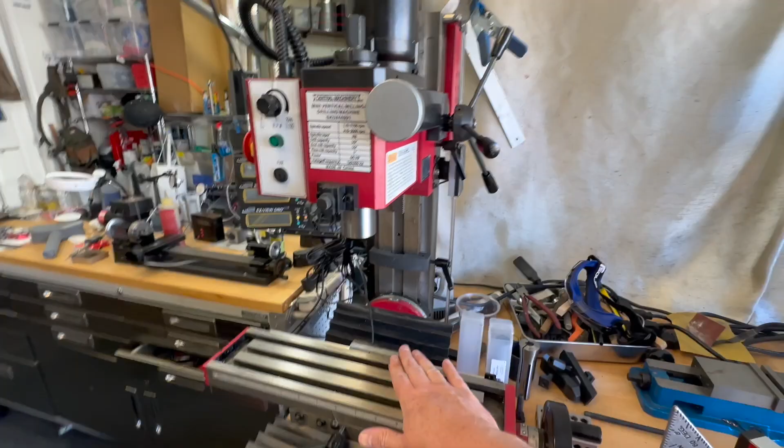Today we're going to be talking about aligning our Harbor Freight mini mill to the bed. So this is our table, sometimes I call it the bed. It moves all around under the mill head, which can move up and down. Now, for a lot of things, we want the tool that's coming out of the mill to be perfectly 90-degree perpendicular to the table. Now, the problem with a lot of the Harbor Freight mini mills like mine, or maybe it's a good thing, is the angle is adjustable.

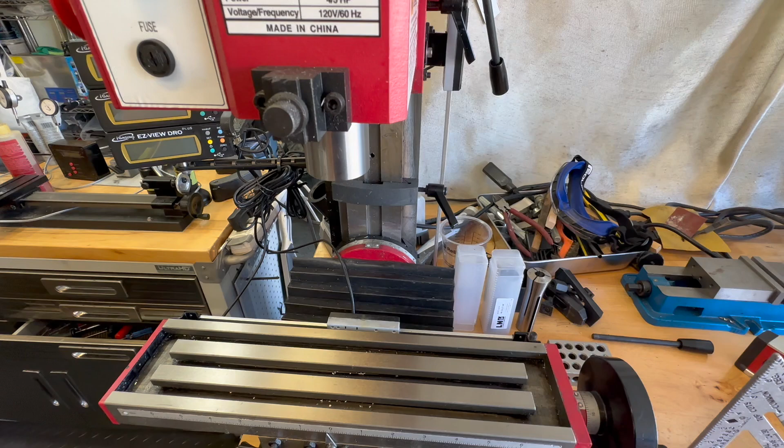Now, as you might expect, this indicator right here is useless. It'll get you maybe within 5 degrees, something atrocious. So you're better off just ignoring it until you set your own vertical alignment, and then obviously you can put your own mark in there to be helpful. Now let's talk about a couple of different ways we can do this, starting with relatively cheap and easy ones, then on to more expensive ones that are going to offer more accuracy and precision.

So we're going to start out with something very easy, which is a lot of people have a digital level. This is nothing particularly special.

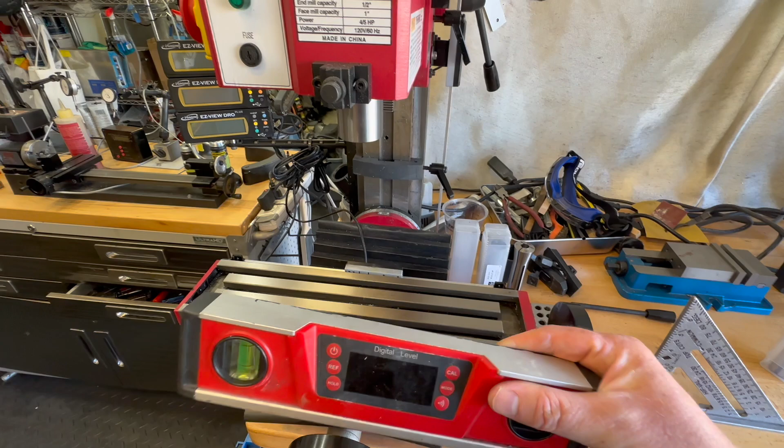So what we're going to do here is first make sure our bed's all nice and clean, so there's no crud on it, because we do want to make sure we get a really good alignment. We're just going to get this on here. It doesn't magnetically stick to it. Fire it up. You see it's giving us a 0.3 degree angle.

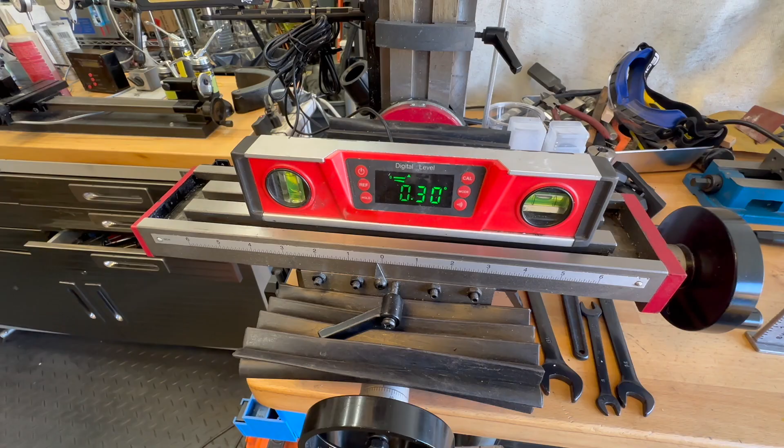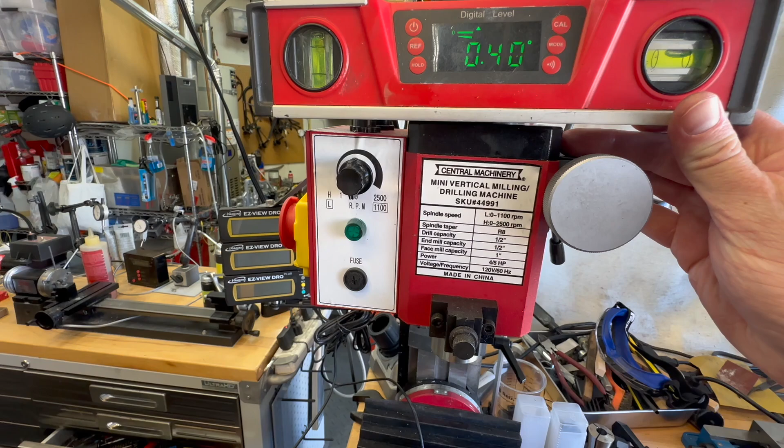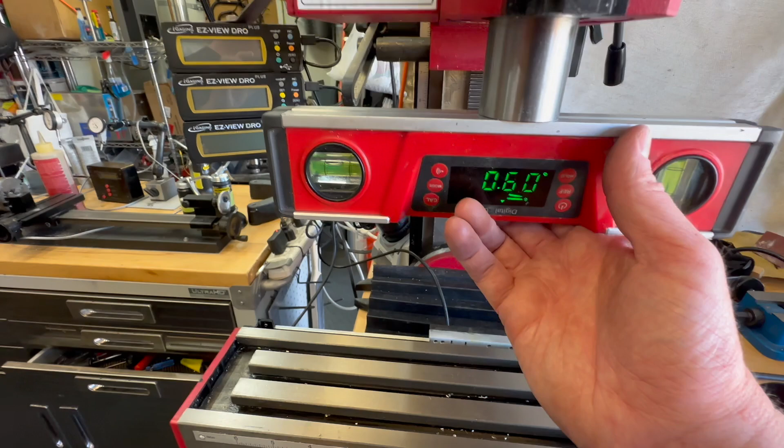Now the question becomes, well, what do you align it to up here? One of the things we could do is put it on top of the mill head here, 0.40, which means we would have to rotate it to the left to get it into alignment. You can see if we put it on the head itself, probably the most accurate, we're getting about 0.6. So let's try to get this in line with what this is here. Let's try to get it to 0.3. So it's saying we're about 0.25 degrees off.

What we're going to do is loosen the bolt back here just a little bit. And we're going to tap with a hammer up here, make real small adjustments hopefully, until we can get this part to be the same as this part down here.

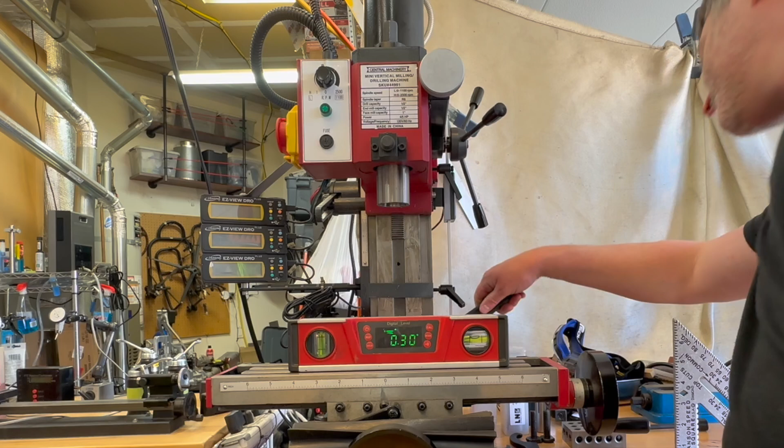All right, I don't know how loose we're going to have to make that, but as you can see with the wrench back there, it's the wrench that comes with it, 36 millimeter. We loosened it a little bit. Might have to loosen it more, but let's try starting there. It's not going to hang from this, even though it is magnetic. A few taps, let's see where we're at.

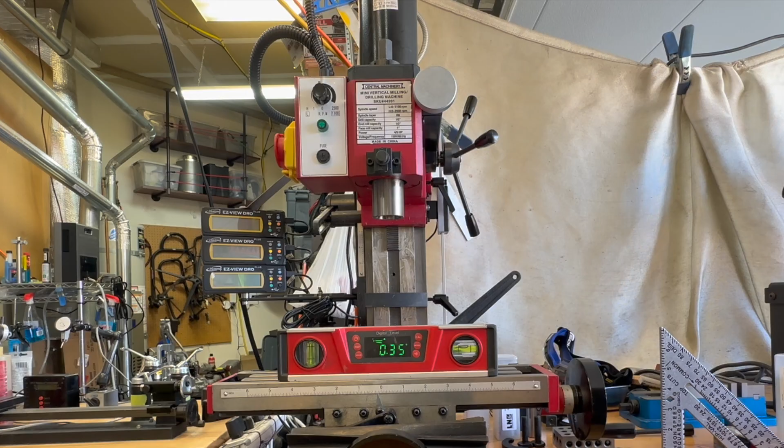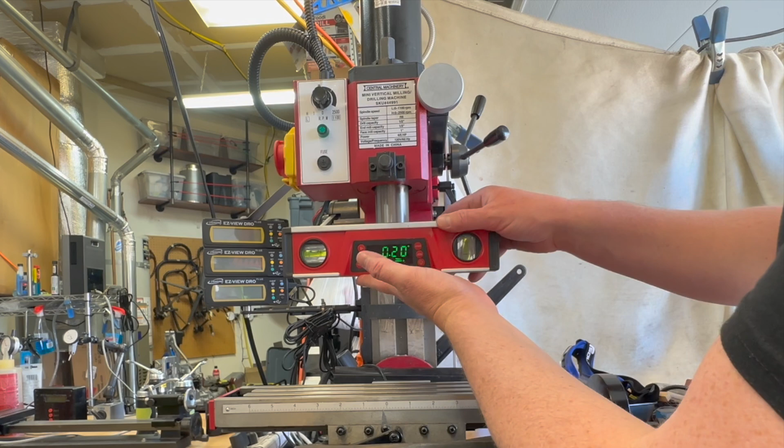So let's see where it moves when we tighten it. See, now we're at 0.2 instead of 0.25. So what we may have to do is undercorrect it to 0.25, into 0.3. Just 0.3. So you can see it's going back and forth between 0.25 and 0.3, which makes the exact measurement here a little tricky. Another way of doing it is just to set a reference.

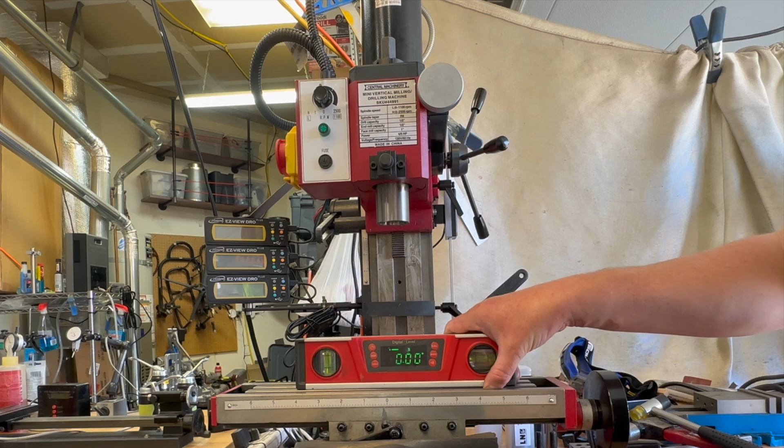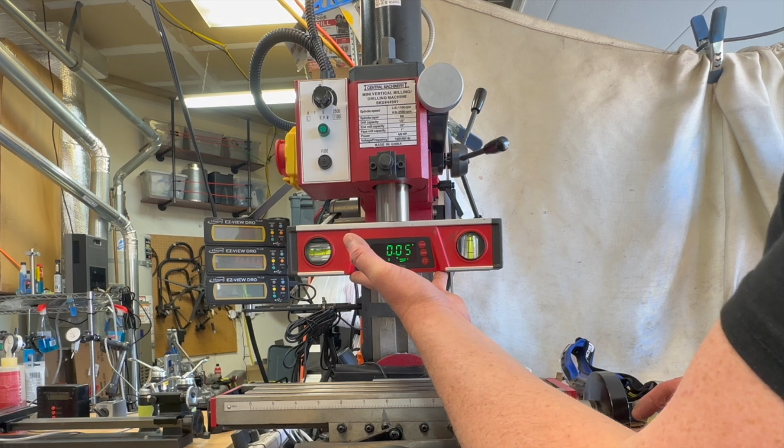So now we're at 0. We can see how much different we are from this. 0.05. The limit we can really get here is probably somewhere around 0.05. So we're going to call that as good as we can really get with this method. On to the next method.

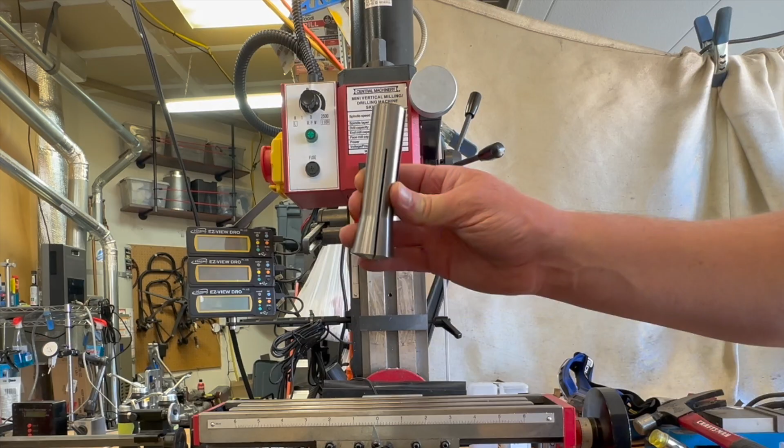Now for the next method, you're going to need some different parts. If you saw my other mill video, we talk about runout on the stock chuck versus a really high-end chuck versus collets. So collets are always going to be best for holding your tools. The problem is you need a different collet for every diameter tool.

So this is a 12 millimeter collet. Let me show you. It's an R8 collet. That's the type of collet, which is the shape that goes into the machine, and then the 12 millimeter diameter, which is the diameter of the tool it's going to hold.

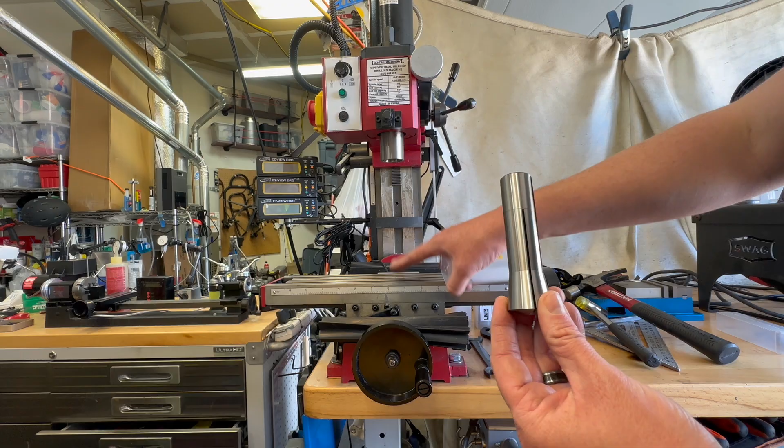You can see there's a key in it, and then there's threads, so it gets pulled up into the machine, and as this tapers, it tightens the collet around the tool. And these are extremely accurate, and they also give you the most working space between the bed and the rotating part, the mill. So we put this in, feel for the key, and then tighten to pull it up.

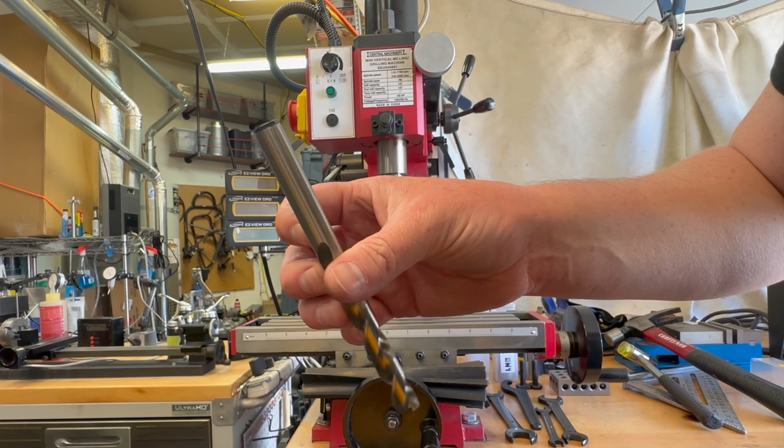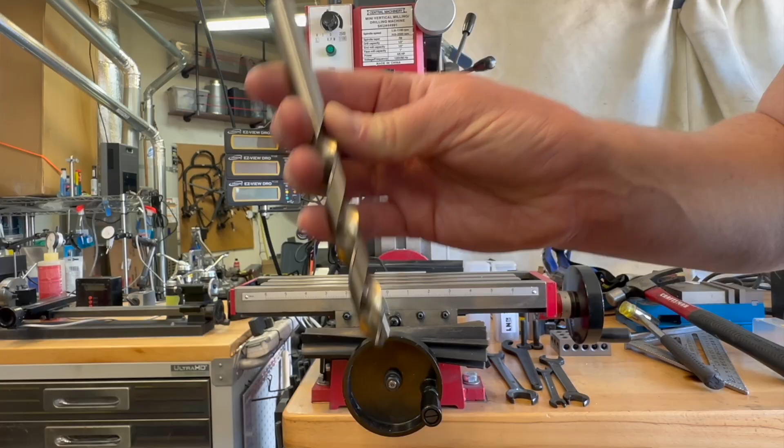Before we pull it all the way up, we want to put a tool in that we kind of trust. So this is a Chicago Latrobe drill bit. These are extremely nice drill bits. This happens to be 12 millimeter, which is going to match this collet. I do try to use diameters that are on the slightly, let's say, larger side than like 3 or 4 millimeter, which in my opinion are more likely to get a bend in them over time. So I want to trust something more that's around this 12 millimeter diameter, or even more.

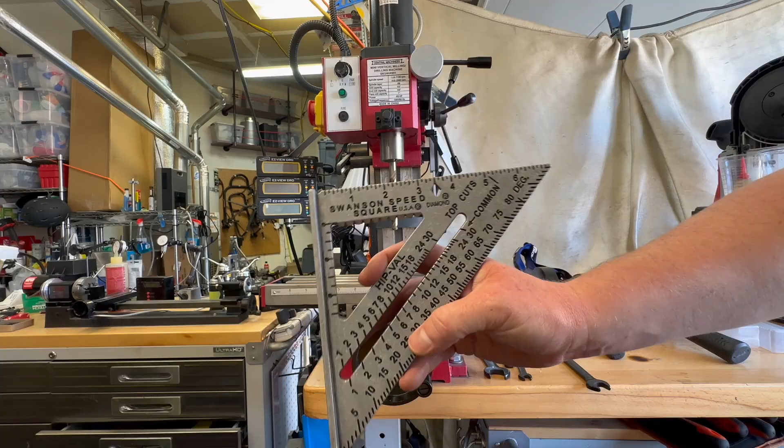So let's put this in. Pull the collet to tighten it. This tool in here to hold, and then we can tighten. And then what I'm going to do, I'm going to take one of these speed squares, which are fairly accurate right angle, got a nice flat spot right here to put on the mill. So what we're going to do is we're going to see how much of the tool lies flat against here.

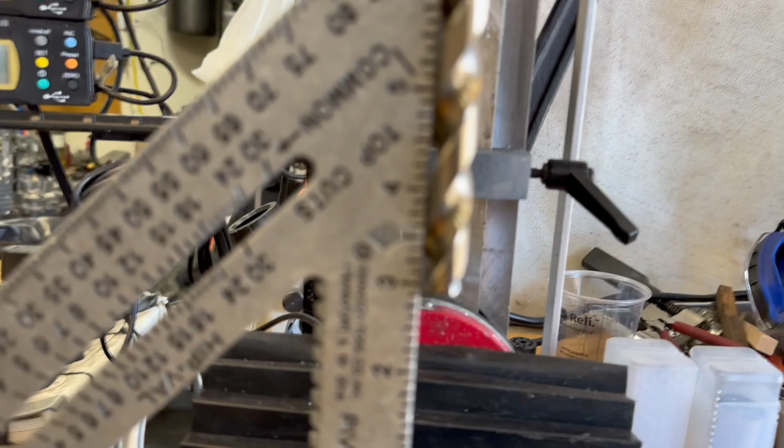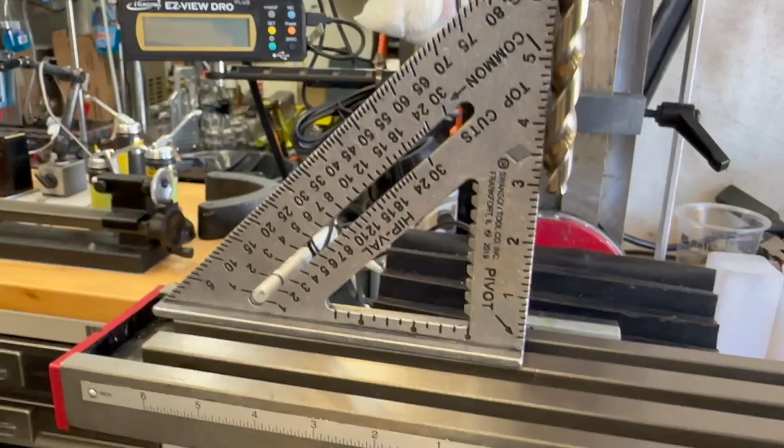So you can see here, zoom in, down here, they're not touching. This looks like it's more than it is because of the rotation, but you can see they're not touching here. They're starting to touch here. We're touching up there. So there is an angle as measured by this device. Let's measure on the other side just to confirm. On the other side, it should touch the bottom first.

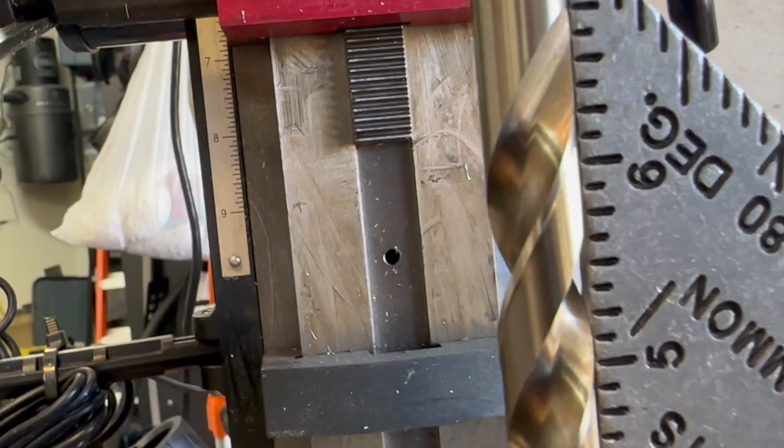We are touching here, it looks like. And then as we go up, it actually doesn't look too bad. So it looks like we're about as straight as we can get from this method, since one side looks a little off and on this side, the gap at the top is really hard for me to even show you. It does exist, but I'm having a really hard time seeing it with the camera. It's basically non-existent. So with these methods, this is probably about as accurate as you can get. And whether or not that's accurate enough depends on the accuracy that you're trying to machine.

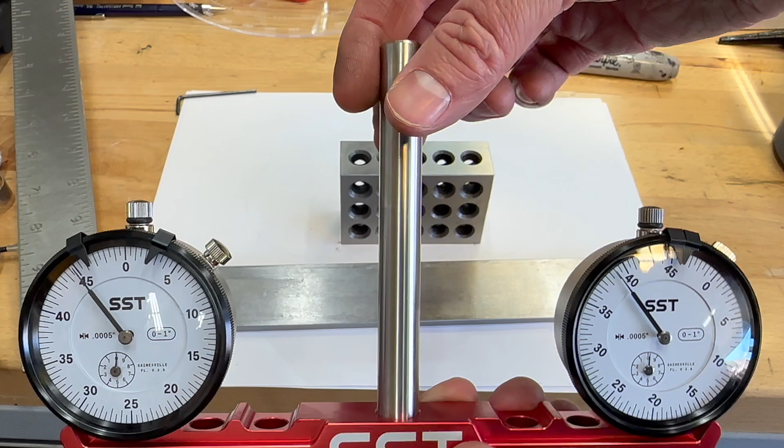Now let me show you the method that I use to get these aligned. That's much more accurate, and you can actually align not just in one direction, but in both directions, although it's a bit harder to correct the forward to backward. All right, so here you're going to see SST, Stupid Simple Tool. And as you can see, the 6-inch, 4.5-inch, 3 inches, you can put these two dial indicators these distances apart, or any mix and match thereof, to get the relative distance. This is a 1/2-inch shank, so we put it in a 1/2-inch collet. And then when this goes down, depending on the rotation, it's going to measure when these two sides hit. And this is a precision piece.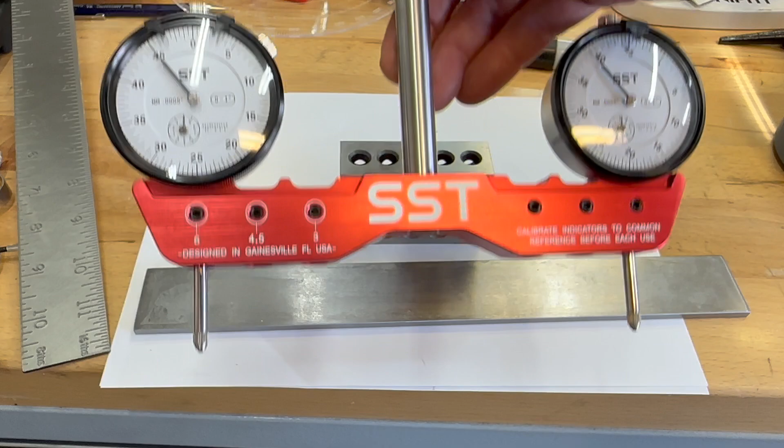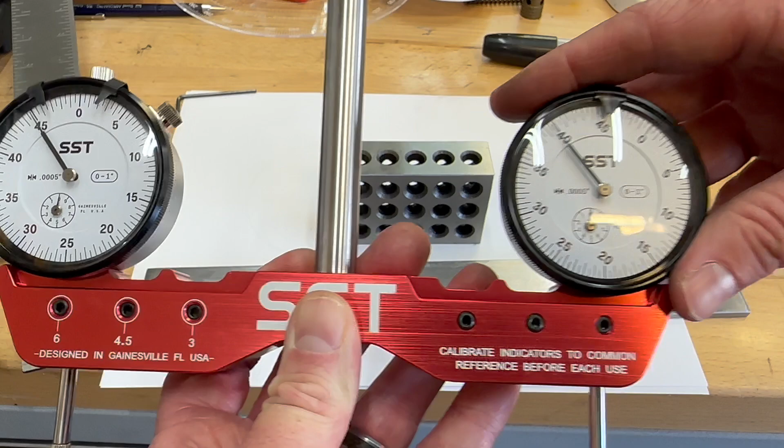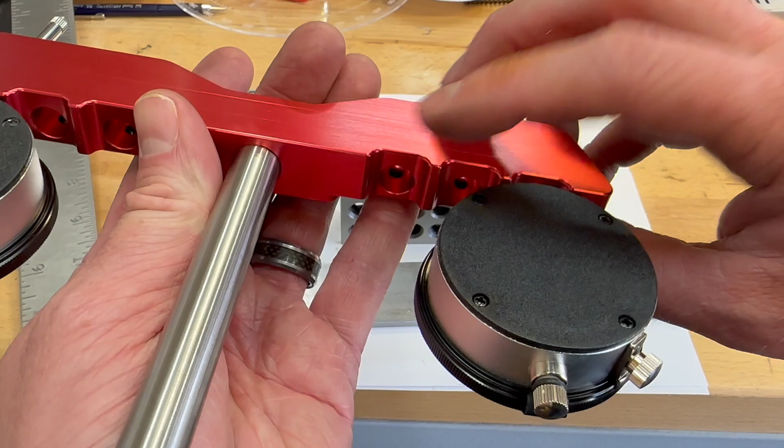Now, we do have to calibrate these, and the two dial gauges are not identical. This one, you can see, you can rotate it to adjust it. So we can set that these are going to be measuring the same amount when they're pressed in the same amount. You could also shim them as you put them in. The thing I don't like about shimming is that it's going to change every time I move them around anyway, so might as well just calibrate them. Now to calibrate them, you do need some extra pieces as well. I wish this company just built a calibration block for this. It would make it much easier, but I'll show you how I've been doing it.

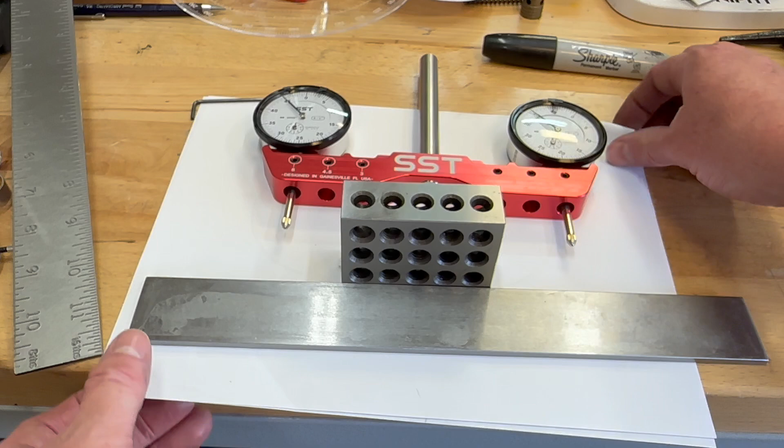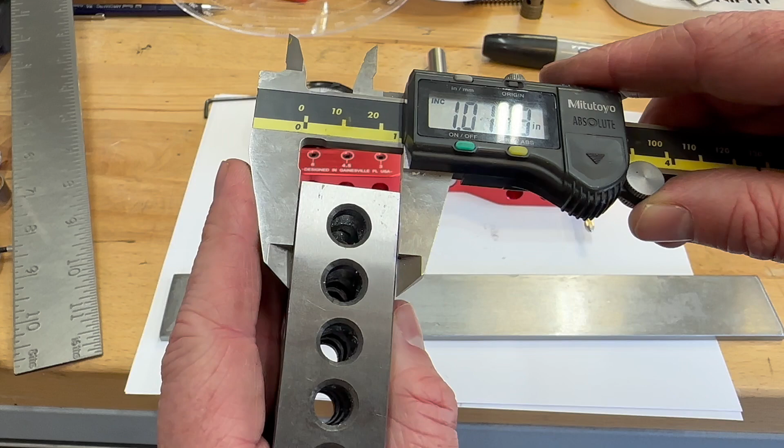So this is a setup block that I use for my mill, and it is extremely accurately made. So we're in inches. Let me zero it. So let me show you when I'm measuring this. I use it a lot, and it's still, yeah. And this goes into your chuck, or in this case, we're going to be using collets because they're more accurate and give us better working distance. To use this tool, you do have to calibrate it. So you have to have a flat surface.

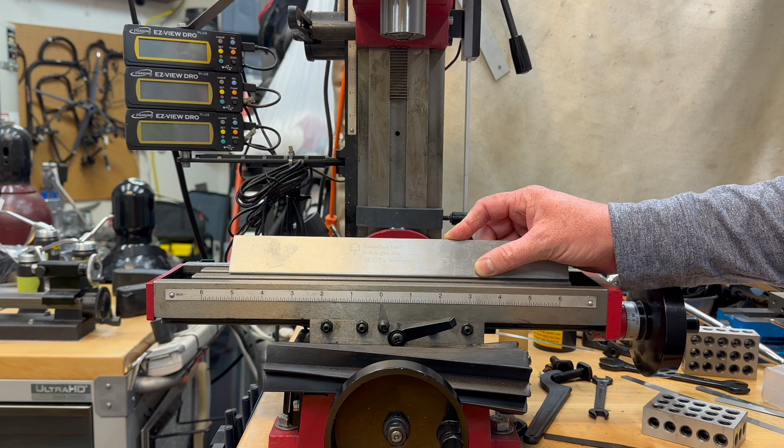Now, how do you know if your bed is flat? Well, it should be flat. The table should be flat, but in case you're wondering if it is or not, something that's useful to have if you're doing this type of work anyway is to invest in a straight edge. Here's the one we have here. So to use these, I just like to put them against the surface, and then I look down real close, not going to be able to see it with the camera, to see if I see any light coming through, or to basically feel if I can rock it back and forth at all. Let me try to get you real close here.

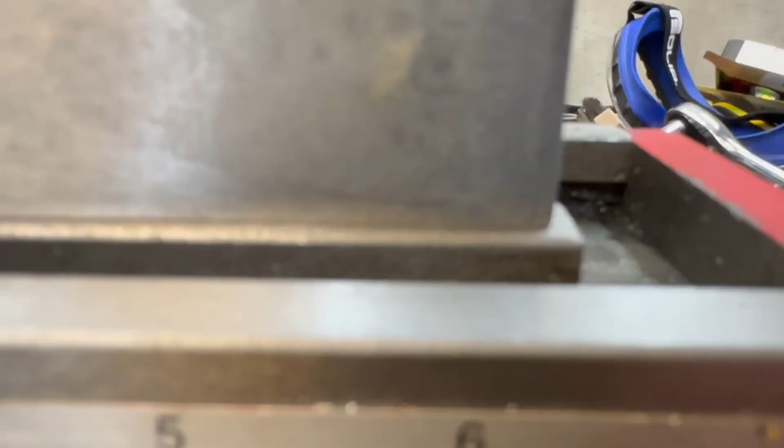You should be able to see that the straight edge is sitting extremely flat on the surface, so it's going to be certainly close enough for this type of calibration. So nice and flat as well. The reason that's nice is we can just kind of drop this down on our table here, and then use it as a surface to put the tool flat against.

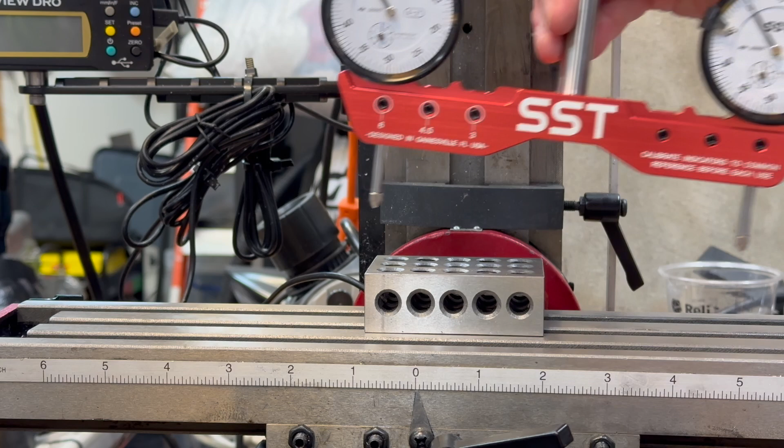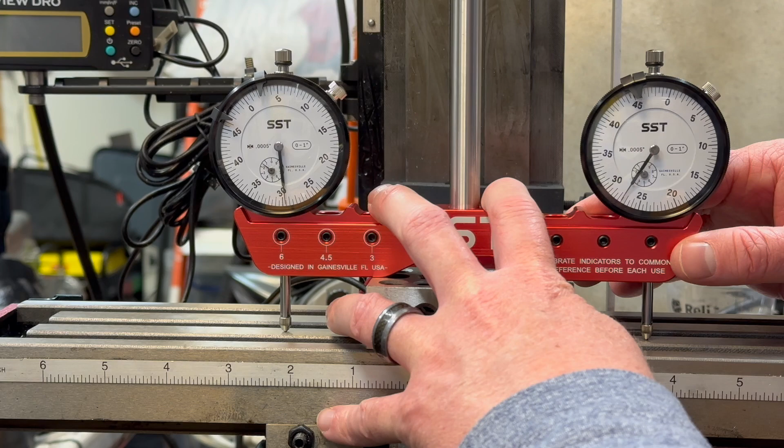At this point, what we want to do is hold it in place and then adjust the dials so that they read evenly. I always like to take more than one measurement, so there's different channels here, so let's move it to another channel and try to get it centered on the channel. And you want to find a measurement that's as consistent as you can be. We're going back to this side.

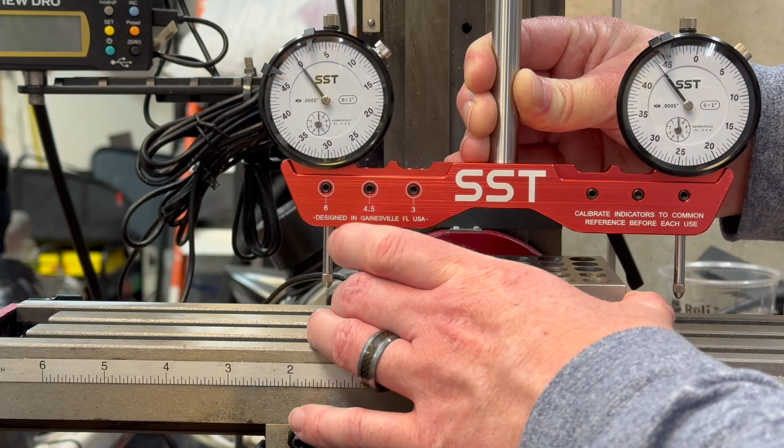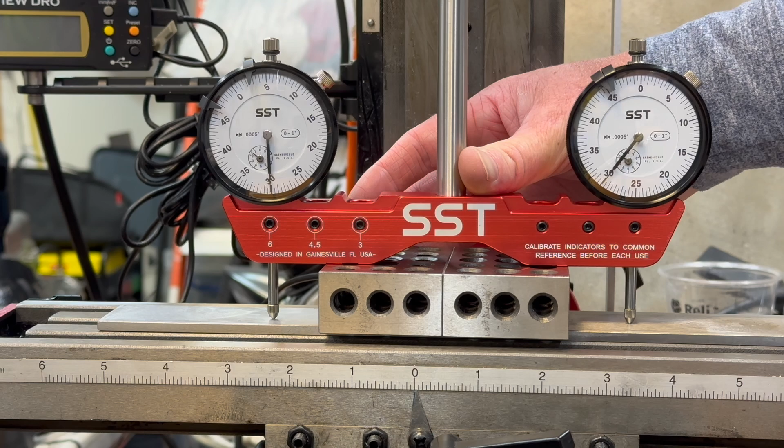The other thing is, because it's kind of hard to get this centered on the blocks, we can put 2 blocks together, see if that helps out at all, get a consistent measurement. Another thing we could try doing is using the straight edge as a surface. It's going to be at 6 inches, somewhere around 1,000th. It's going to be really hard with a setup like this to get this thing calibrated even to better than a 1,000th of an inch.

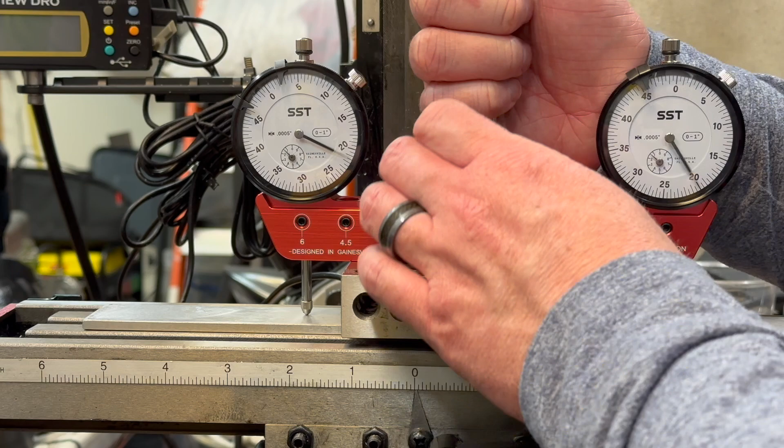Just for fun, let's put gauge blocks on different sides, see if that makes a difference. Now they still look calibrated. Let's, for fun, flip our straight edge over. Let's see if that works the other direction as well. So we're kind of chasing our tail at this point, but you're going to see that the limitation of this type of calibration is probably around 1,000th of an inch. With the imperfections in the table as well, at least for one of these mills, you're really getting to the limits of the precision of this whole apparatus. This is going to be as precise as I know how to get it.

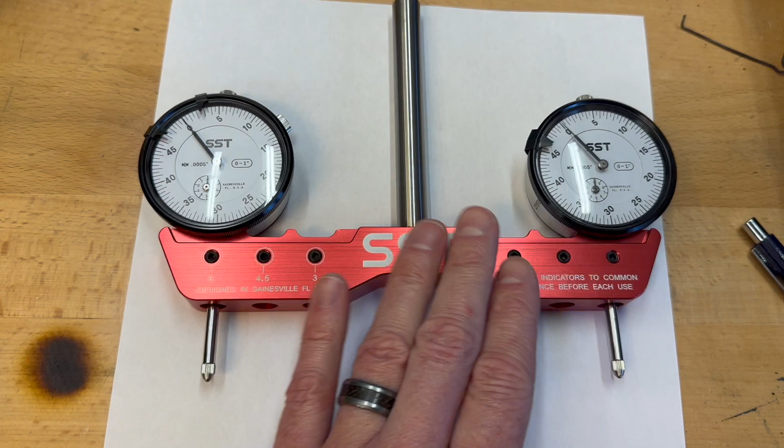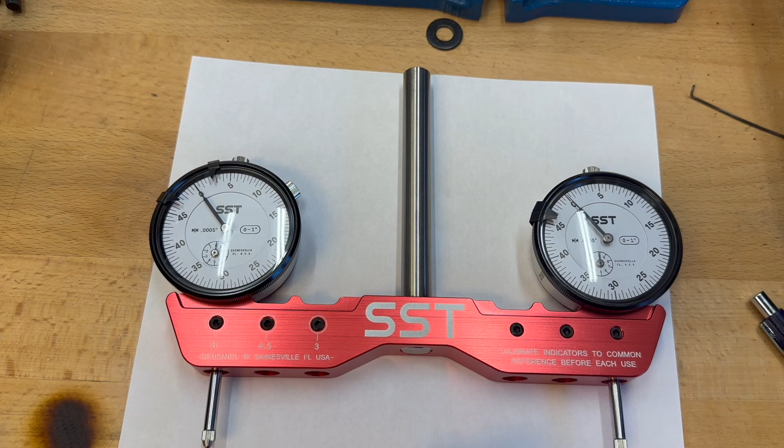All right, now the problem with calibrating this thing is it's really challenging, even with straight edges and setup blocks. I'm never really able to get it calibrated better than 1 to 2,000ths of an inch. Luckily, despite what this says, the calibration really doesn't matter. And that's because this thing is on an axis that spins, which means we can just spin it around, take another set of measurements, find the difference, and then use that to figure out what's flat and what's not.

So what I recommend doing with this thing, and I actually did email this company. I email a lot of companies and they virtually never email me back, even when I'm offering to buy things from them. We'll see if SST actually emails me back.

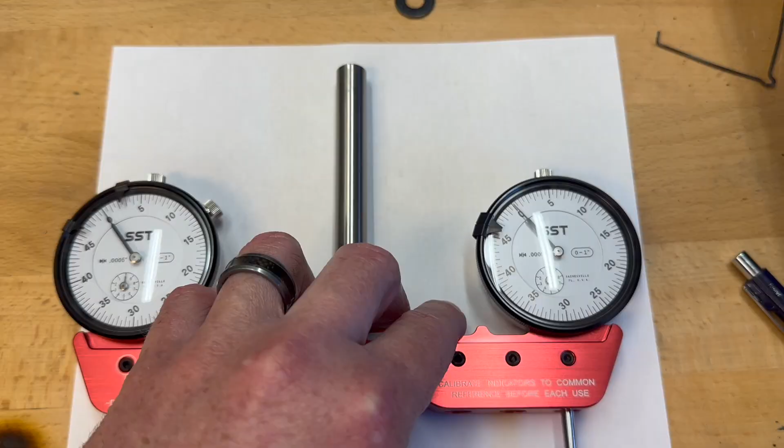I did say that if they want to build something that makes this easier to calibrate, something you can fit in perfectly and then push in across these different setups the same amount, they can actually calibrate these things. That would be awesome. You can try to calibrate them yourselves, and if you can do better than a 1,000th of an inch, then that's awesome. I don't think I can reliably do that. So instead, let me show you what I do.

You do need a piece of paper or some way of taking notes. So we get this set up in the collet, just like normal. Tighten up on the collet, and you just want to come down and take your first measurements. Line up the bed. All right. So once we have this thing lined up where we want to go, what you want to do is just bring it down enough that you feel comfortable with the measurement. I like to lock in the fine adjust.

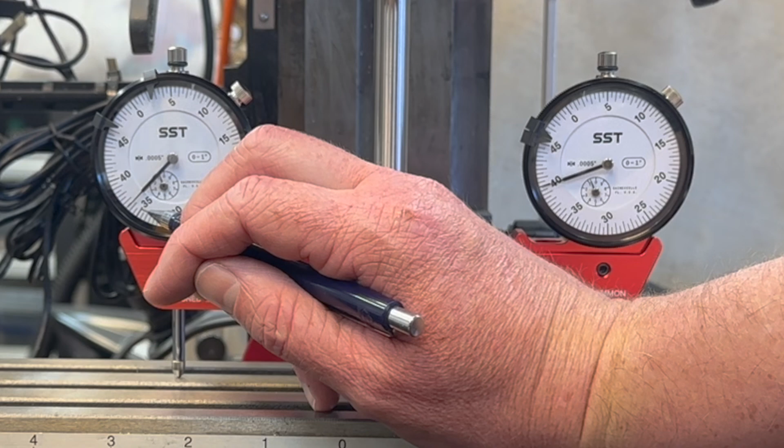So get 30. Whoop. So we can get 40 on the right one. All right. Now we just got to write those numbers down. I'll show you how I write it. So on the left side, it looks like we have 35, 36, 36 and a half. On the right side, we have 40. All right. Let's bring it back up. And we just spin it around.

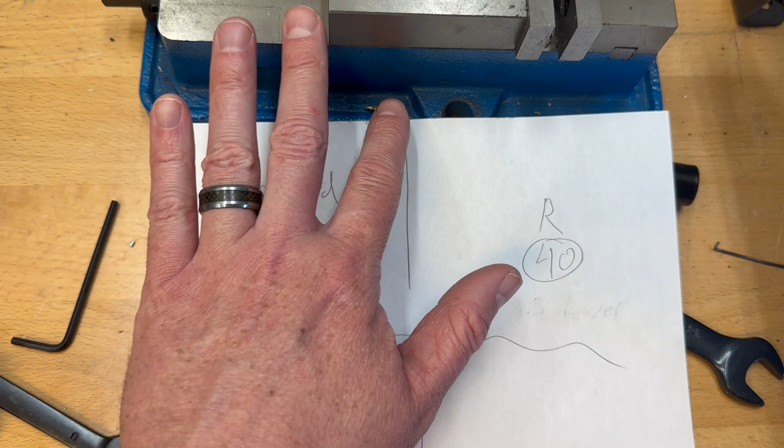Now, obviously, you got to look on the back of it, see where you're going. You don't even have to get to the same measurements, but it makes your life a little easier if you do. Totally up to you. It doesn't really matter. All right, so let me show you what I did. So when we have it facing forward, this line demarcates the shaft that comes down. On the left, we were at 36.5, for the right, 40.

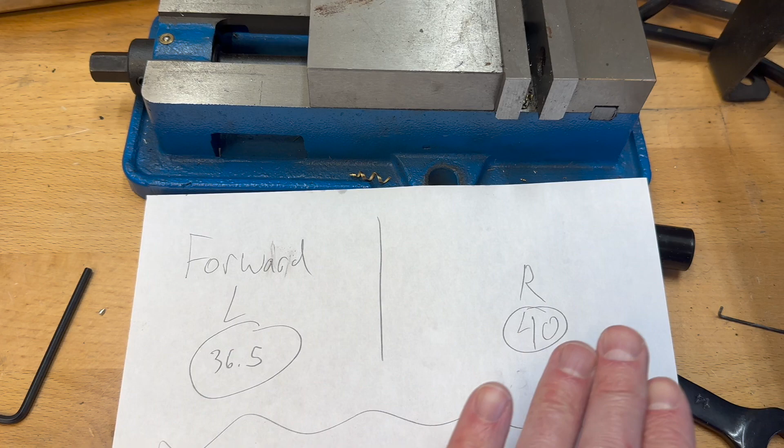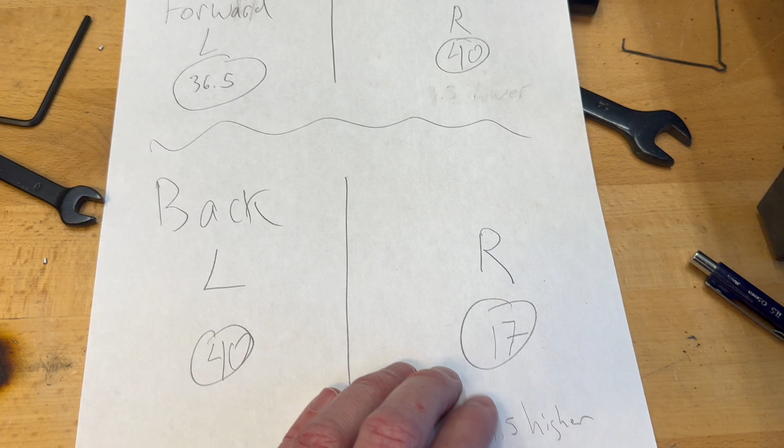Now we spin it around, this side goes to the right, so I set this one at 40 again, just to make it easy. And then you can see the left side went from being pushed in 36.5 to being pushed in 17. So it's not being pushed in nearly as much, meaning our right side is 19.5 higher. If the right side is higher, that means that we're tilted to the left. We need to tilt it back to the right.

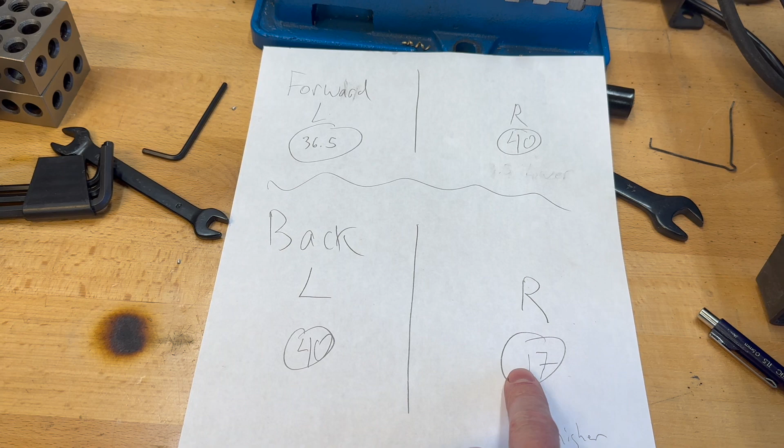At the end of the day, the offset should be the same. So if I'm at 36.5 here and 40 here, and we're flat and we flip it around, then this should be 40 and this should be 36.5. So again, you don't need to set the 40 on both sides, but then you got to do a little bit more thinking about it. For me, we'll keep that diagonal the same.

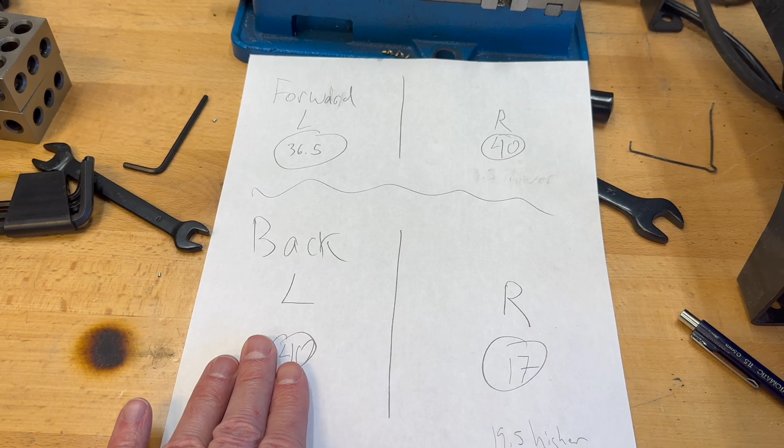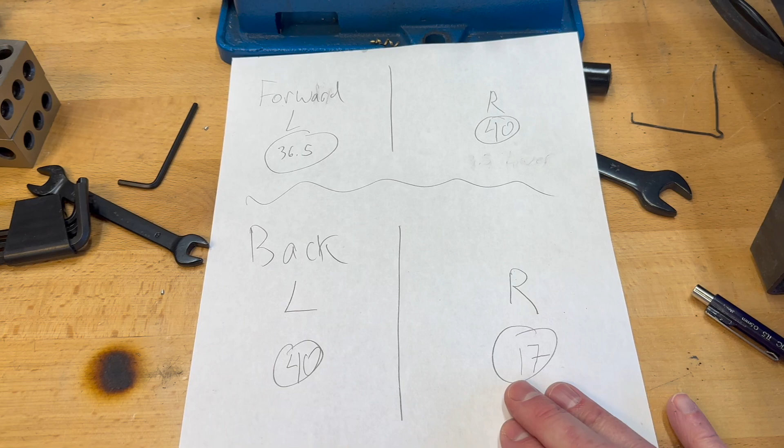So what we want to do is keep moving our top here to the right until the left and the right dial readings are the same. All right, let's get going. So we want that 36.5 to be closer to a 17. So we're gonna lift this side up. Let's loosen.

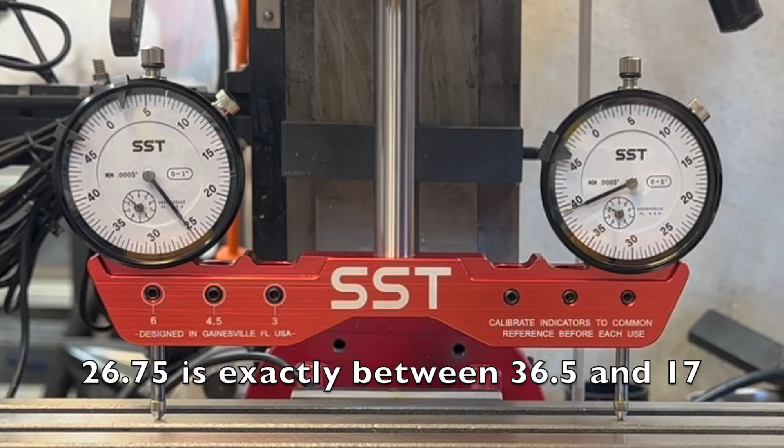That's really close to 40 and 26.5, but we still have to tighten it, which tends to mess this up, but let's see where it goes. 40 and 26.5, right on after fighting with it for a while. All right, so let's flip it around and see where we're at. All right, so now we're spot on, 26.5. We have 44 diagonal, 26.5, 26.5.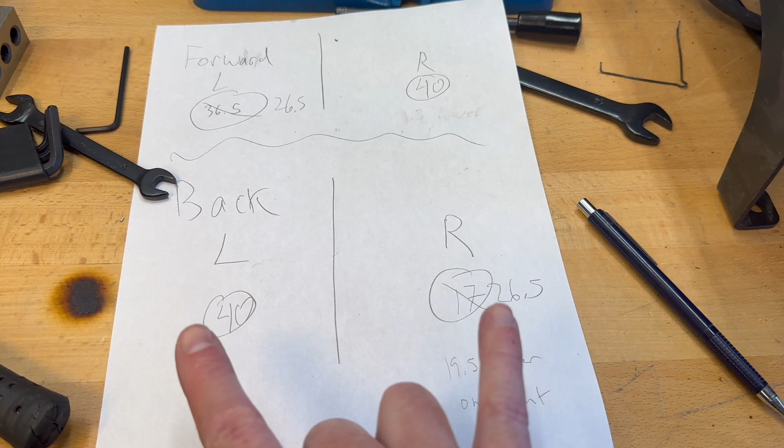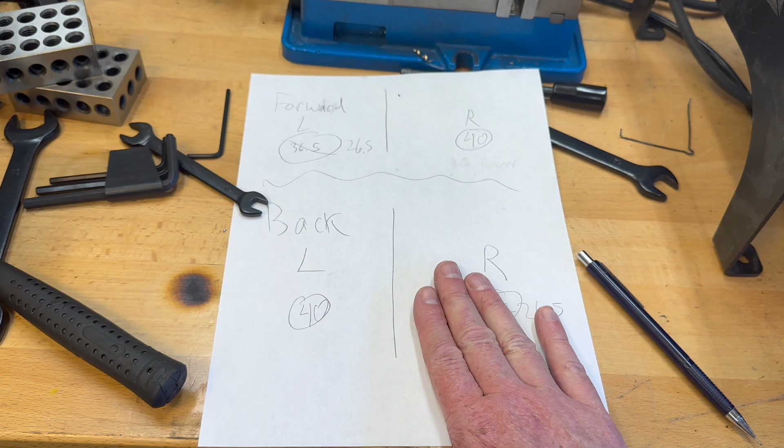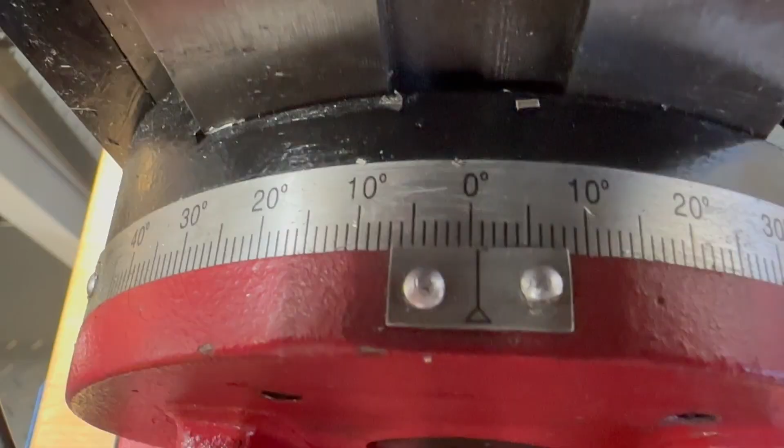So you can see, even though these two are not synced, because the numbers are the same regardless of which 180-degree rotation we're at with the tram, we know we are in spec, and we didn't have to have a headache over synchronizing these things. So let's do it in the forward-backward now that we're all tight left to right. Actually, let's see how far off the indicator is, too, for this thing. It's about half a degree off, maybe. Let's say half a degree off.

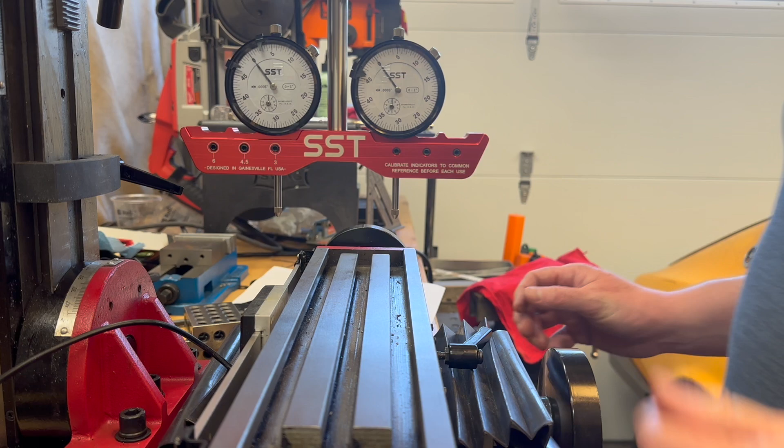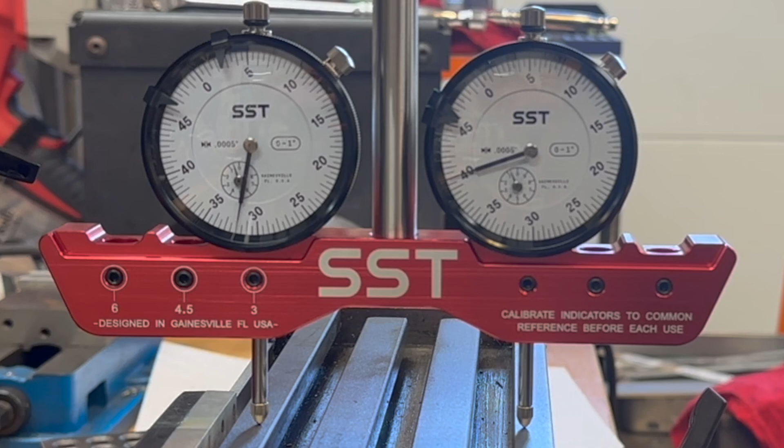All right, so we'll get switched around to the short direction because we can't do the long direction for forward-backward. All right, we have our tram reconfigured for a 3-inch separation. Let's get back in there. So 40 and 31, 32, I'd say. Flip it around. And since I had already put shims on these, it is checking out to be perfect.

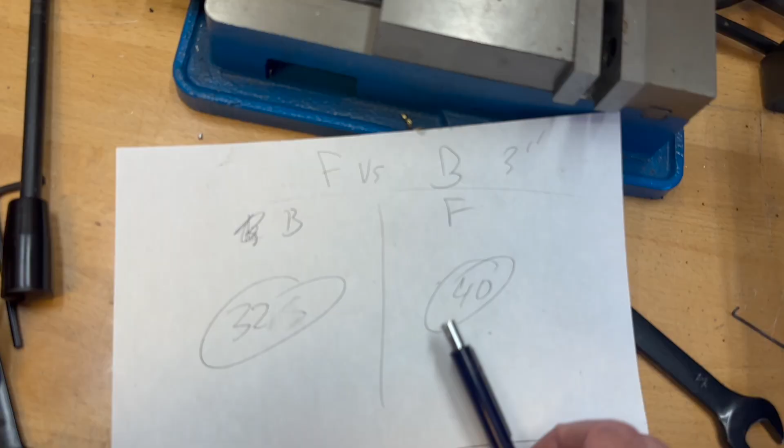So this is front versus back. I remind myself it's the 3-inch side, so back, front. Originally back was 32, front was 40. Now back is 40, front's 32. Let's see here, it's right angle, yep.

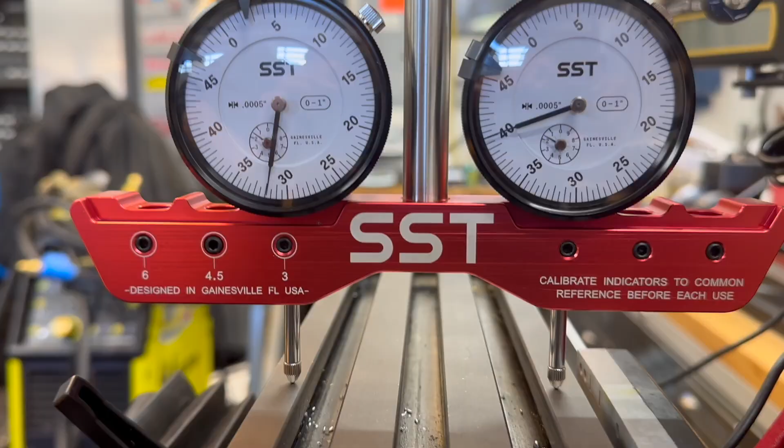And just as a reminder, we did have to dial in some shims right here. To do that, these are just 12-inch feeler gauges. We can cut this off if we want. And we had to detach the bellows here, which keeps the chips from getting out of here, but we had to detach it so we can get down here and get these shims in.

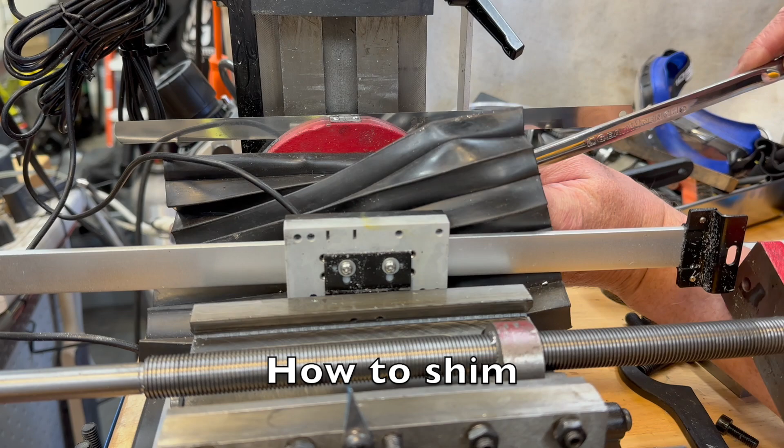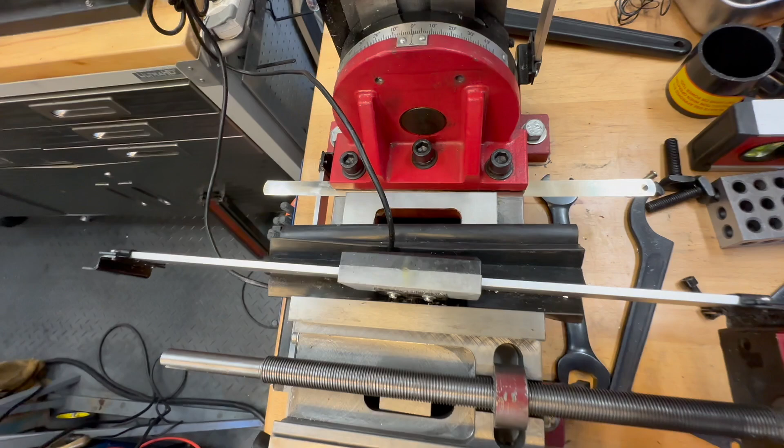All right, so it looks like we could probably shim under the front of this, and then we would maintain our ability to rotate easily without the shim getting in the way. So what we're gonna do is loosen these, see if we can get a shim under here. So we're gonna clean out really well in here, loosen these up, and use the shim there to adjust the front to back. So we're gonna start off with the 10 thousandths shim in there, just to see where that gives us, and go from there.

So now we're all set. We are now ready to true up this piece, make sure that we are sliding left and right and keeping the same distance front to back. Basically, we're not sliding on an angle. We're definitely sliding left and right. All right, let's get that checked, and then we'll be all done.

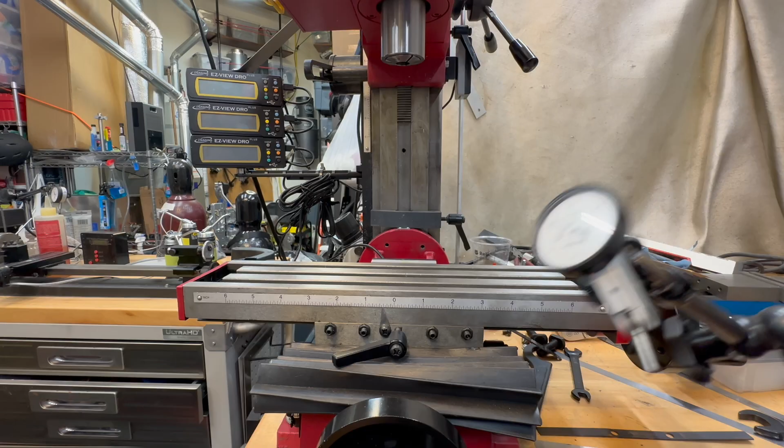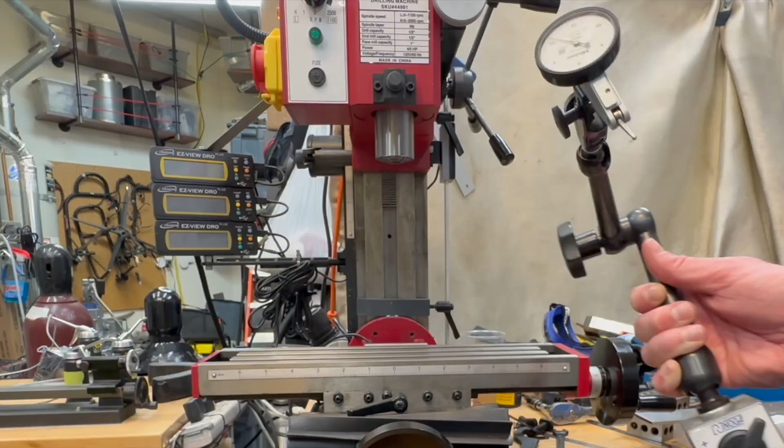Finally, what we're gonna measure is basically how straight this table is running back and forth. So to do that, we're gonna use another dial gauge, and we just need to put this on a hard reference point. It's not gonna move, and have it run along the edge here as we move the table, see if the channels are moving left to right, side to side, what have you. So I'll start out just getting this thing mounted on the magnet.

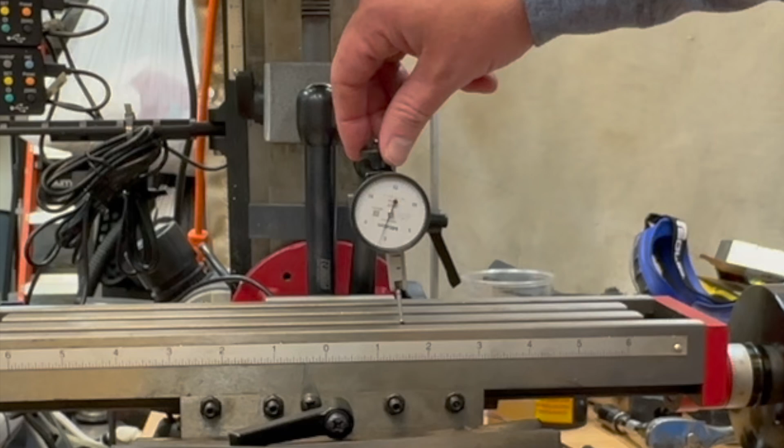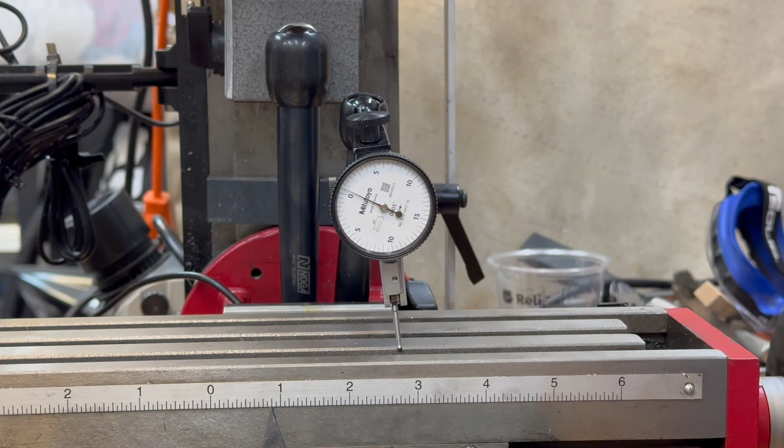All right, so we're zeroed out. We're pretty far on this side of the table, so we're gonna move the table and see if we trend towards one direction or the other. All right, see, we made it to the other end, and we're still pretty close to zero. Each one of the gradations here is a half of a thousandth. At most, it's a half of a thousandth off. That's actually very impressive.

All right, I hope you found this video useful, showing a couple of different ways to make sure that your mill is aligned across all the axes.